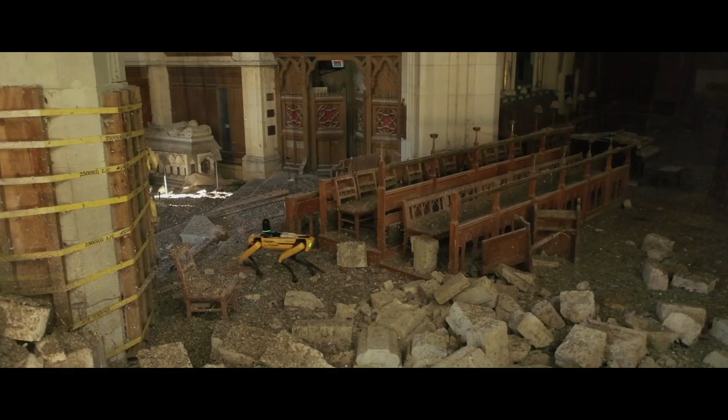That's where Spot the Dog, equipped with a laser scanner, came into play. Spot came to us through a relationship we'd formed with Aware Group. We formed a collaboration and brought that to CCRL, our client.

The journey of Spot into the cathedral was one that we took step by step. There was $190,000 worth of equipment, and if it failed, we weren't allowed in to get the equipment. There was a nervous moment where we lost Wi-Fi through 2 metres of masonry wall and we couldn't see Spot, and then we heard his robot footsteps come back around the corner.

That was a big relief, and then we went to work capturing data in laser point cloud scans and 360-degree photos. That data has been passed to the construction team and also our modelling team, and has informed the detailing of the stabilisation works that's ongoing so that we can eventually get people inside the cathedral and start the rebuild.

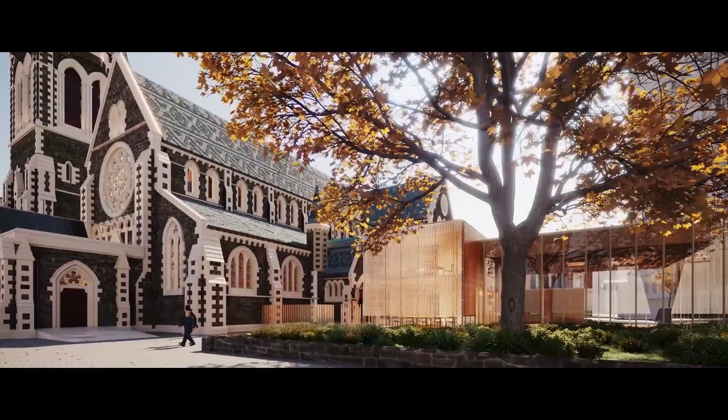For the cathedral, we produced high-quality renders using 3D Studio Max and Corona. Photorealistic materials were applied to the geometry and real-world lighting was forged until the right conditions were attained. Atmospherics and fogs were shaped to create the desired look and feel for the final set of images. An animated short was the concluding production piece for public release.

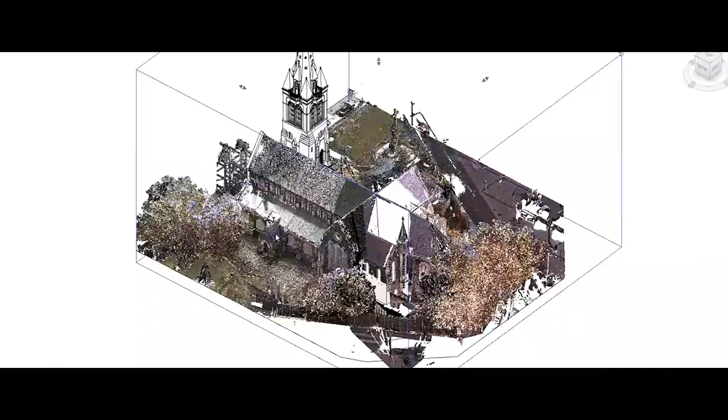On this project, the visualization team was part of Spot's journey into the cathedral. Our visualization team has produced a number of animations and still renders on this project for our client. It's a very long-term project, so the ability for us to inform, particularly the public of Christchurch, where this is a central project, has been very important.

Warren and Mahoney use photogrammetry to generate complex models from photographs. We sometimes do this for miniature models and real-world scale objects.

One of the really cool things we do here at Warren and Mahoney Architects is use a combination of photography and photogrammetry software to be able to capture miniaturized models of artist installations. Sometimes we use drone photography to help us create models of larger installations.

Photogrammetry process works by us importing raw data into photogrammetry software. We then go through and create a 3D model. The 3D model then is used to inform our decisions on how it represents the artist's vision.

Sometimes we'd have to re-sculpt the models that are produced by the photogrammetry software in order to more accurately represent what the artists have envisioned.

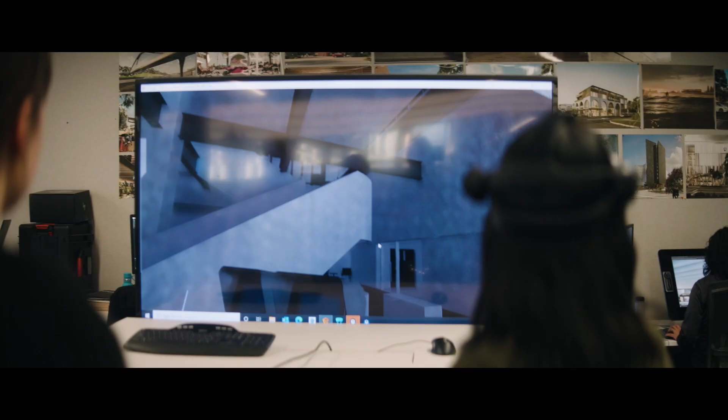Following the photogrammetry process, we'll often take the model we've created into our real-time software, and it gives us a way to explore it a little bit further with our clients, with their designers and the wider stakeholder team. And it gets us into the model and sort of interrogating it in a real-world space. So within this real-time software, it also allows us to experience the model in VR, which is a really profound experience, particularly for the designers themselves.

We've often had them almost in tears at the experience of seeing their project in that space.

So while the real-time process is really important, ultimately we see it as sort of an intermediary step before we take it into Corona Renderer. So these beautiful renders we create with Corona allow our clients to connect with their stakeholder groups, but also the communities that these designs are going to be within.

Warren and Mahoney utilise digital and generative design on projects. It's an exciting proposition when the visualisation team gets to produce high quality renders of these projects using V-Ray and Corona.

Digital design is a pretty broad concept, I guess, but for us it's about playing with the latest and greatest tools and softwares and understanding what they can do for our design process.

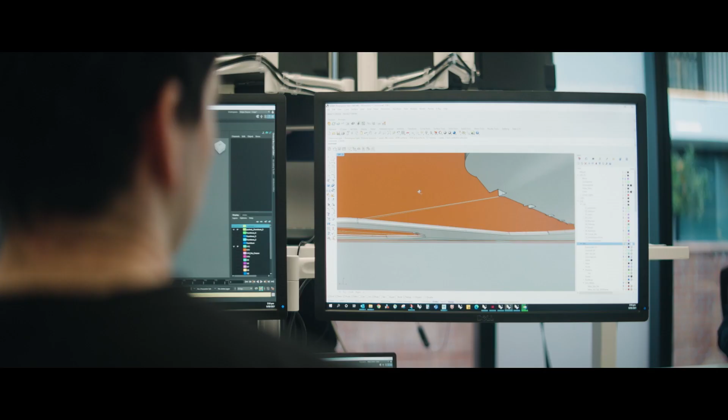We use a lot of V-Ray for our design work. It's a great way to visualise what we're working on as we work through the design process. One of the great additions to V-Ray is the V-Ray for Grasshopper plugin, which lets us communicate some of those parametric scripts we're working on as we work through them.

One of the projects we've used this on is the Pullman Hotel at Auckland Airport. It was partly about designing a really complex form in our lobby space, but also about understanding how we can rationalise that and resolve it to help construct it in its entirety.

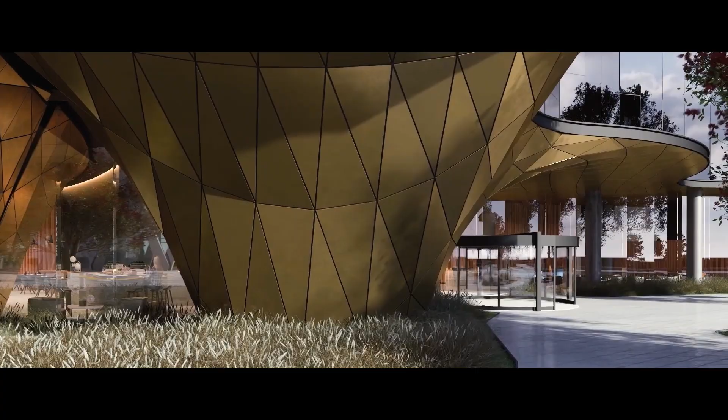The Federal Street Tower competition was an invited competition we did a couple of years ago. It had some different demands because it was obviously very fast-paced being a competition. We needed to create something quite evocative and exciting, and some of these digital tools were really great for creating those exciting designs, but also being able to work through them and iterate through them really quickly.

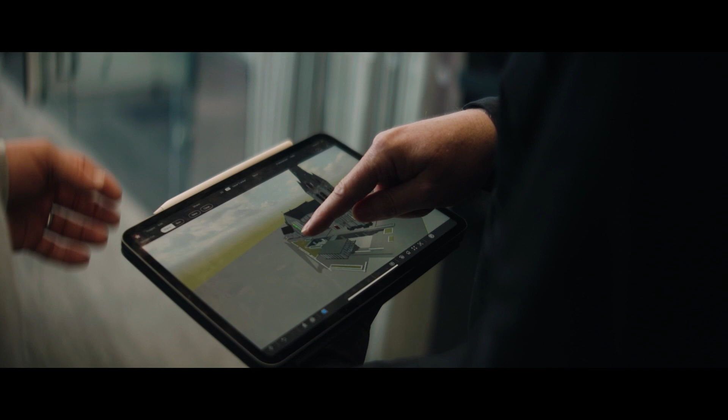Digital design's going through a massive uptake in innovation. AI, machine learning, robotic technology is all playing a role in the way we design modern buildings for the built environment.

Sustainability is on everybody's mind right now. The built environment plays a big role in the way we address sustainable outcomes. Using machine learning, AI and other new tools is giving us further insights into the way we can design and respond to these enormous challenges facing us.

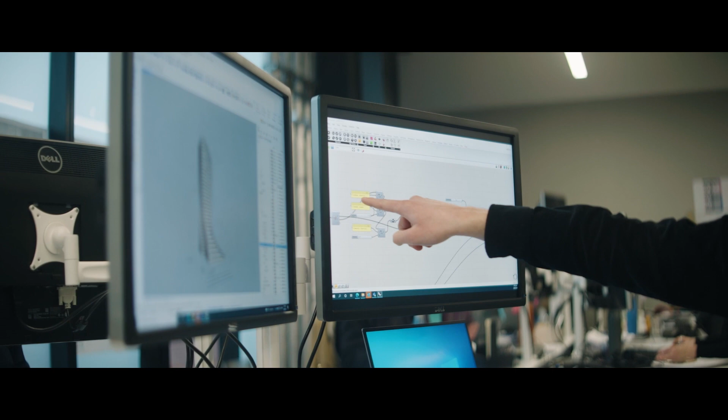Part of our job is actually researching as well, understanding what some of these tools can do and how we can use them in our design process. It's quite a fun part of the job because it's not looking at live projects but really getting to play with the tools and understand what they can do.

Partly we're working through these studies as we go to understand our concepts, but the visualization team's crucial in terms of communicating those designs to a wider audience, particularly the wider design team, the client, and where appropriate, the wider public.

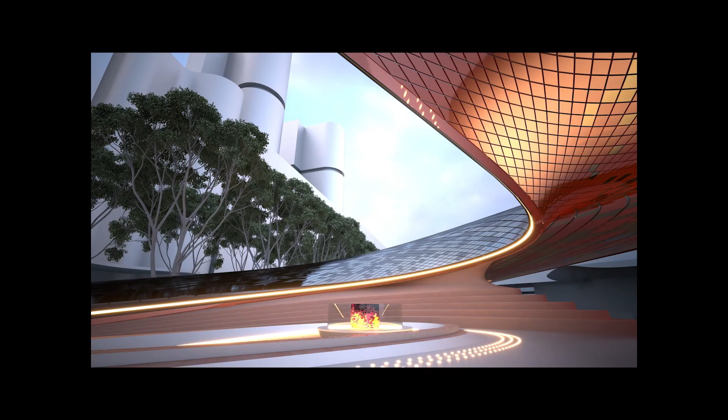Warren and Mahoney utilise real-time rendering for creating storyboards of animation projects. We're always looking for ways to improve workflow and quality.

A really important part of our process is that we're not just making things up as we go along. We've made a plan through our storyboard, and then when we go on site to capture that content, it's based on decisions we've made earlier around the time of day, lighting, and that sort of thing.

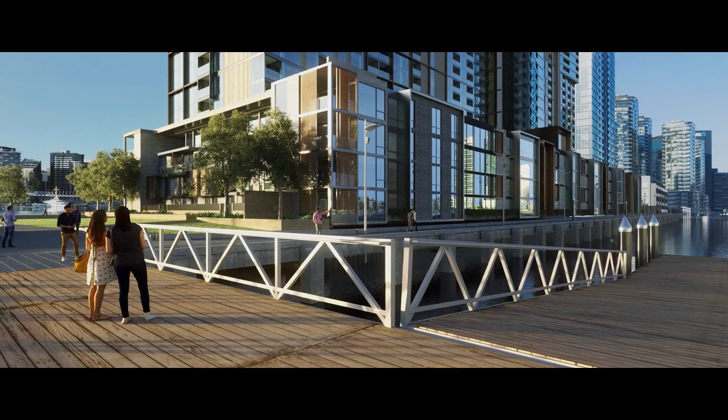When we looked at the market for renderers out there, we made a decision based on quality, and in that sense, Corona just couldn't be beaten. It suited us perfectly in that sense, but also for speed.

We use Chaos Phoenix to create simulations of water and fire in cases where it's required.

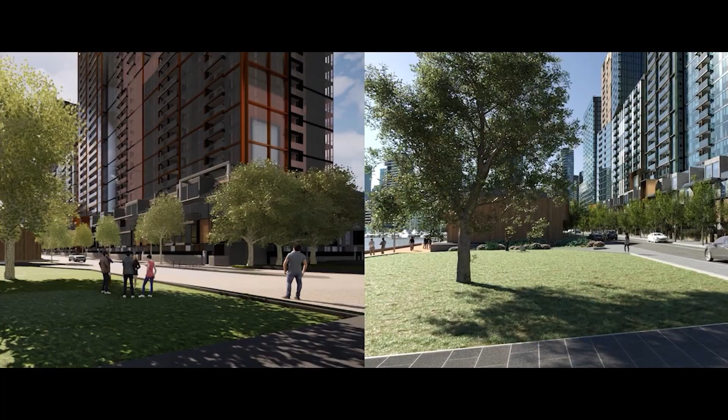Using Pulse Scene Manager gives us a huge amount of artistic freedom, but it also takes away some of that work around managing scenes. And you pair that with something like the Corona interactive rendering process, and it allows us to be more artistic and more creative.

You've heard us today talk about using both V-Ray and Corona renderers from Chaos Group, and being able to manage that process is really important to us, and that flows on to our clients and their stakeholder groups. Being able to make sure we know what we're doing at all times is absolutely crucial.

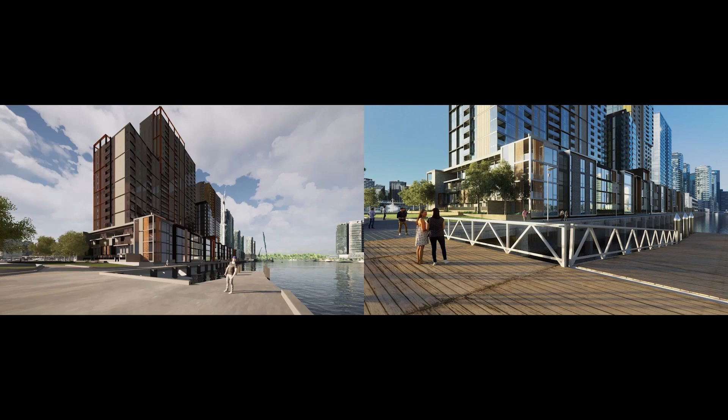That's where Pulse Render Manager comes in. Being able to use both those renderers with no issue means we're fast, we're efficient, and we know what we're doing at all times.

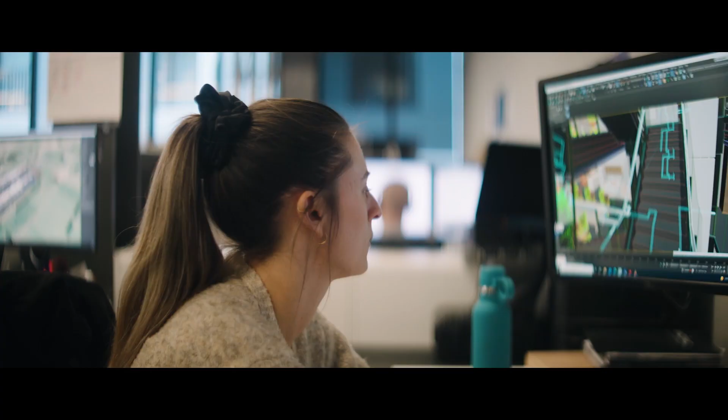I've been using Chaos Group software for over 20 years. I always find it to be innovative and industry leading. I'm excited to see how, in the future, real-time rendering and offline rendering continue to converge and come together. Less technical barriers opens up more creative freedom. Thank you.